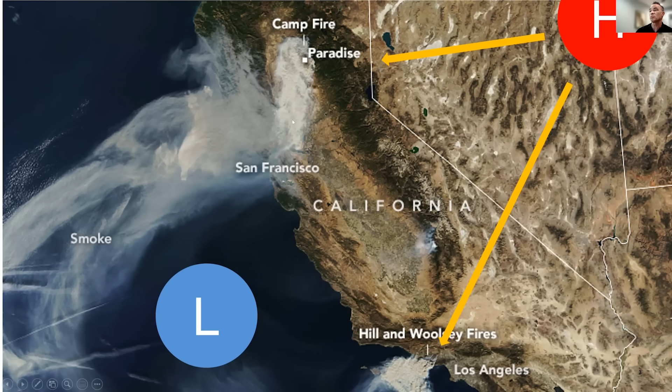We're going to take a look more in depth at the Woolsey fire, because that's what I have a video to show you of. I was there myself for about 2 weeks. The Woolsey fire started in this area where the arrow starts there, and you can say it's a certain distance from the California coast.

Where it started was vegetation that hadn't burned in quite some time. Keep in mind, during that time of year, in the fall, you have very dry vegetation. On this particular day, the live fuel moistures were critical, at 60, even less than 60% in some areas. You also had a relative humidity that was in the single digits. You had winds at 70 miles an hour, and you had vegetation that hadn't burned. In some areas, we didn't even have a burn history on it, which means it could be over 100 years.

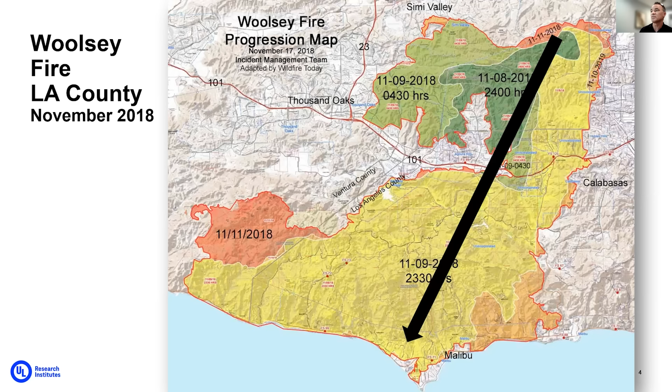But a lot of the vegetation that you see in this burn scar of the Woolsey fire was 15 to 30 years old, which means you can have vegetation that's 30 feet tall in some areas. So you think about a 30-foot tall piece of brush that is subjected to these hot, dry winds. All you need is a start to get things going, and it's really going to be off to the races. That was certainly the case in November of 2018.

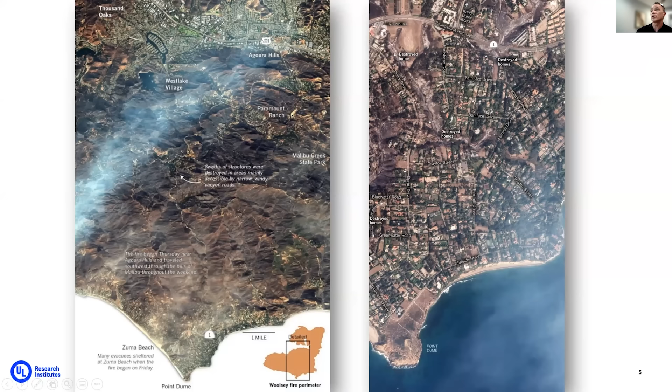So this is a satellite shot on the left here, and you can see the 101 freeway cutting through. The fire started just north of that. This actually shows you the burn scar of the Woolsey fire. And what you also see is the interface.

I like this picture because it really shows that really well. As the fire dumps into these vegetative areas, it's going to burn up through these canyons, run up the canyons actually, and impact these structures. All where my cursor is showing you here, those are all interface area. Now, what you don't see, because it's panned out so far, is the intermix structures, which there's quite a few in this area as well.

You can see all of this is interface down here on the south end, but you got firefighters in those areas, and there was a wall of fire rolling through this vegetation. I mean, it took less than 10 hours for the fire to get from the north to the coastline.

This is on the right-hand side, a more detailed view of Point Dume, which is this area right here. So this is Point Dume. And you see there's some drainages that run through this neighborhood.

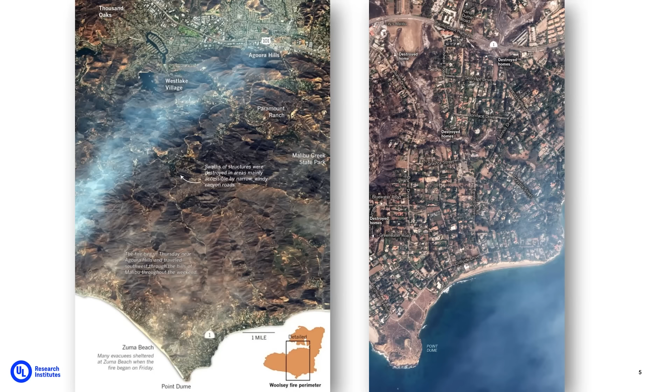And in those drainages, you had an ember cast that started those fires. Keep in mind, when you've got vegetation this dry and 70-mile-an-hour winds, you're going to be throwing embers a mile ahead of the fire's front. So you've got smaller fires starting in these canyons, running up the faces of the drainages and impacting the homes that lie right in the interface, hence the problem.

This is a shot of the end of the fire, where this is the actual fire's perimeter. When they map it out, that's what it was shown to be. That's where the black was, if you will. And in amongst this is a lot of burned out structures. The Woolsey fire burned over 1,000 structures and about 100,000 acres.

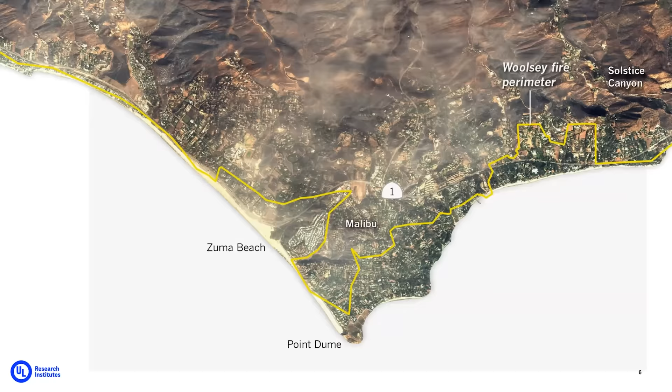So now let's go deeper. Let's look at the actual fire itself. Let's see what the firefighters were experiencing. When you have that mass of vegetation burning in a neighborhood, several different neighborhoods, firefighters are required to defend the structures that they can. Here's what it looks like. Here's what they're experiencing.

We'll go into a little more detail about phase 3. It's meant to simulate two neighboring structures. The source one is on fire, and then you have your target one. We were looking at a number of things during these experiments, including different siding materials on that target structure and how they behaved when exposed to the source fire.

We also have windows in this target structure, so we're looking at window failure—how they fail, when they fail, and once they fail, if embers or firebrands or fire itself could get through there, which would be a failure point on the structure. If you think of it as an actual neighboring structure, there's fuel inside that house. If a window breaks and embers and firebrands start getting in, that's going to ignite the contents of that room, and the house will start to go—it's a chain process from there.

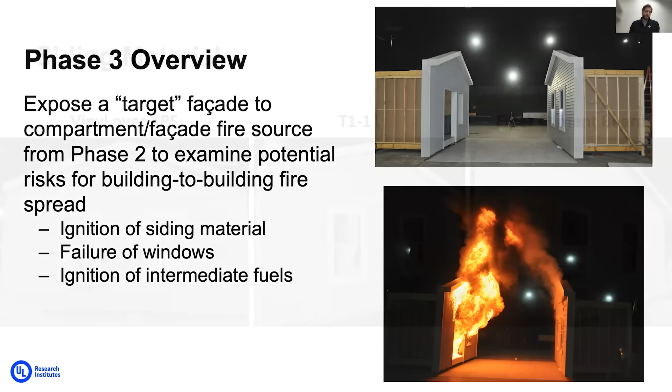The third thing we looked at was putting intermediate fuels, or ladder fuels, in between the two structures, and seeing how, if at all, they contribute to fire spread from the source to the target.

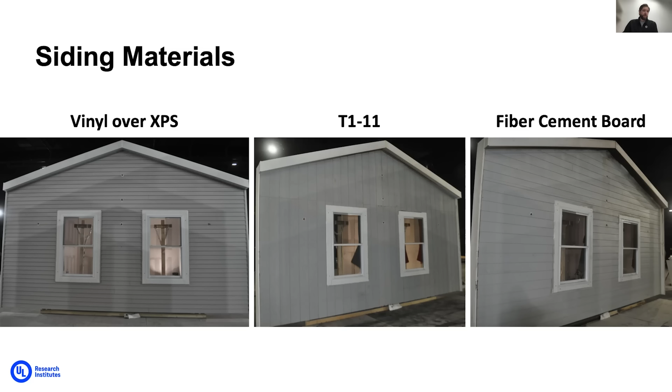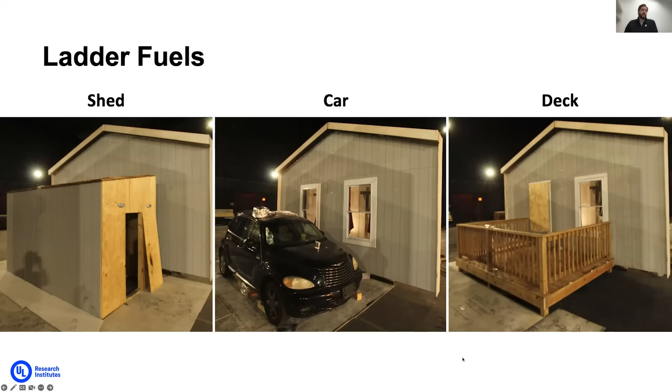For our ladder fuels, we looked at three different types. We looked at a shed in between the two structures, a car—which happened to be a PT Cruiser—in between the two structures, and we also looked at an attached deck between the structures. These are common things that could help propagate a fire from one structure to another, things you would commonly see between residential structures in a community.

This is a quick video of the deck experiment with the ladder fuel. This was the one experiment where we got the target structure to ignite.

This is shortly after flashover. That's essentially when the compartment goes from having a fire inside it to everything in the compartment being on fire. It's a good marking time.

During this project, we're focused on post flashover exposures specifically. So you can see shortly after flashover, the deck ignites on the front. And then as you continue to watch, you'll see it propagate across the rail, and then eventually up the siding. The siding in this case was the T1-11, or that wood base siding. So it ignites pretty quickly once it gets going.

So just some quick takeaways from phase 3 that helped drive our plans for the 2022 experiments that I'll talk about in a minute.

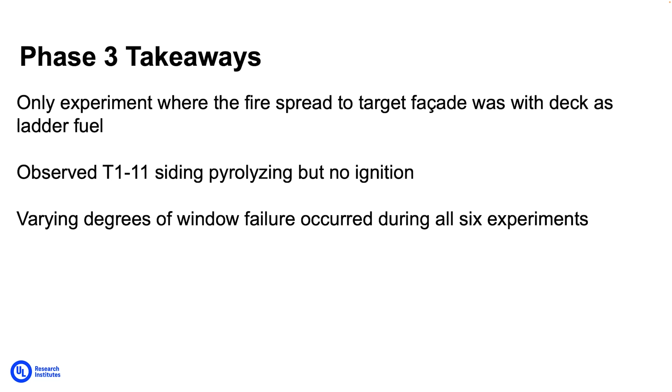The only experiment where we got fire spread to the target was when we had the deck, which was attached to the target. We also observed significant pyrolyzing of the T1-11 when we didn't have a ladder fuel in between the two structures. It almost looked like it was going to ignite, but we were actually testing the capabilities of our lab and had shut down our experiments before we could see what actually happened. We also saw some interesting window failure, which brings me to the experiments we conducted this year.

We actually just finished them a couple weeks ago, and they're looking at those last two bullet points on the previous slide a little closer. So we're looking again at different siding materials. It's a similar setup as phase 3, with the source compartment and then a target structure.

The top picture is the first round of experiments we did. You can see that we're just looking at basically a big wall or big facade with different siding materials on it. And then in our second round of experiments, we looked at various types of windows, which I'll get into in a second. Again, the fuel load is similar to what we had when we did our experiments in 2021, except we have more wood lining the walls and ceiling, so we have a longer burning duration.

What we're investigating compared to the 2021 experiments is that we're looking to go for a longer duration after flashover, longer exposure duration, and we're also looking at smaller separation distances between the structures. In phase 3 of 2021, we did 16 feet between structures, but it's been noted in several documents that these new communities being built can typically have separation distances as small as 6 to 10 feet. So we wanted to look at closer separation distances and how that affected things.

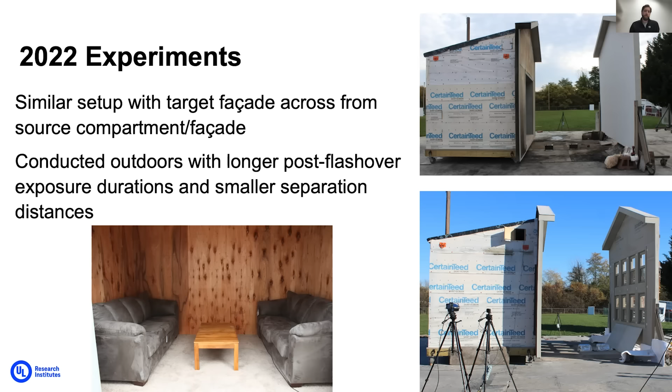We looked at similar siding assemblies that we tested last year, with one exception: we swapped the vinyl over extruded polystyrene for EIFS, which is here on the left. And then you have your T1-11 again, a wood siding assembly, and your fiber cement for the non-combustible siding.

Not only are we looking at the behavior of these sidings at different separation distances and different intensities of exposure to the source fire, but these experiments also allowed us to characterize the heat flux we saw from our source fire and get a good idea of the distribution across the target wall. You can see these little dots on each wall—those are actually heat flux gauges. So we're measuring the heat flux to the target wall at 12 different points across the wall.

By the end of these experiments, we have data sets with 12 heat flux measurements across the wall, but by the end of it, we also have it at different distances. So similar to what we did with phase 2, we're characterizing the exposure we see from our source compartment with these experiments.

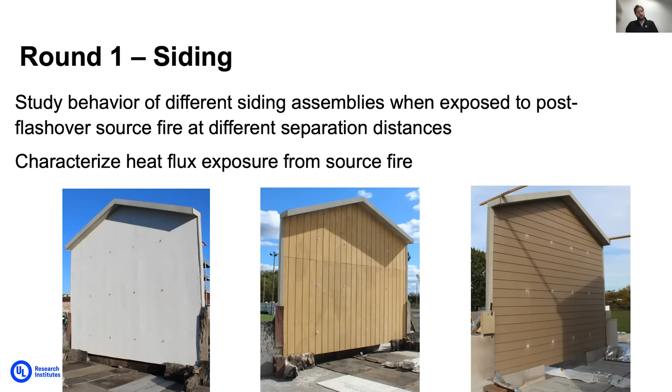And then with round 2, like I said, we were looking at windows. So we looked at 4 different window assemblies.

Basically different variations of tempered and plain or annealed glass. Tempered glass is a little stronger, it's been treated, and it's a little more durable. So we looked at both panes being plain glass, both panes being tempered glass, and then outside tempered, inside plain or annealed, and vice versa.

So there's some codes out there that recommend, and other documents that recommend, if you have a double pane window, having one of the panes tempered. But they never really specify if it should be the outside pane or the inside pane, or if there's a difference between them. So that's one thing that we were looking at.

And then we also conducted 8 of these experiments, so we got a lot of replicates of all these different types of windows being exposed to the source fire.

This is just a more detailed or closer up view of our target structure. You can see we have even more heat flux gauges than round one. We have 15 now on the target structure.

And with these, each window is surrounded by gauges, so we're able to estimate based on those measurements what the actual glass on the window is seeing in terms of an incident heat flux.

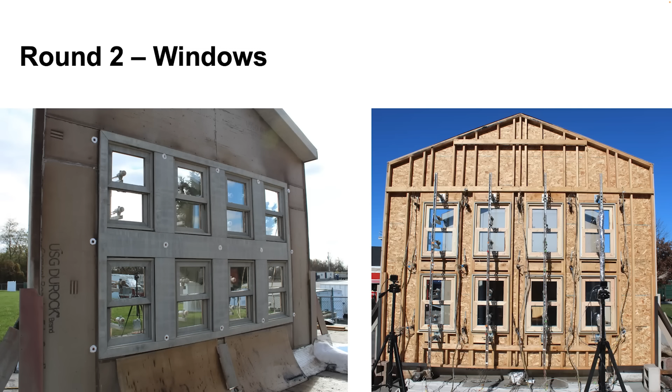And then we also have heat flux gauges behind the windows, so we can measure the heat flux transmission through the window and see if there's any differences between the different types of window assemblies.

And like I said, we just finished up these experiments a couple weeks ago, so we're still in the very early stages of data analysis.

But one thing that we observed over the course of these window experiments that's pretty interesting is it seems there is actually a difference between whether you have the plain glass, if you have one pane plain, one pane tempered, there is actually a difference depending on what orientation you have them.

And the plain glass is not as durable as the tempered, so that would crack first, and then the tempered would go. Tempered glass, if you've ever seen it break, is more of a catastrophic failure than plain glass, which just kind of cracks and then eventually falls out of the pane.

So that shock from the failure actually causes the plain glass pane to fall out and leave a big hole there for all sorts of embers and fire brands to get in. And then on the other configuration, where you have plain glass on the outside and tempered on the inside, we did not see that result.

And then here's just a quick video of what I was talking about. This is a camera view from the backside of the windows. You'll see the plain glass crack first and then the tempered go. And when the tempered goes, a big hole is formed.

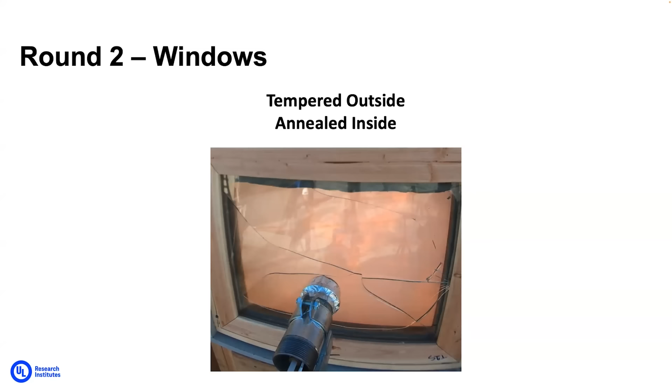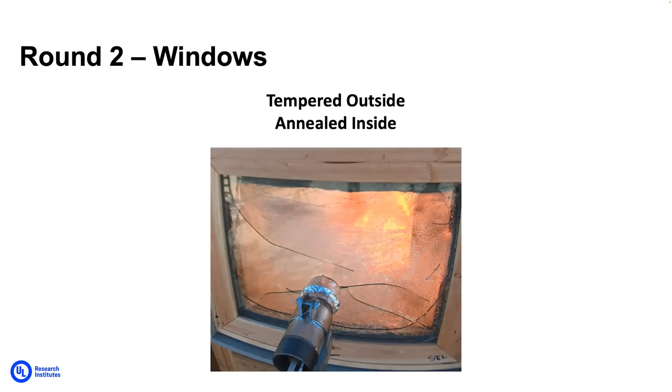Bottom inside pane. BL bottom inside pane. 2 minutes after flash. BL tempered bottom. And again, this was kind of consistent across our experiments, where we would see that this configuration of tempered on the outside and plain glass on the inside did not provide as long of protection as the other configuration.